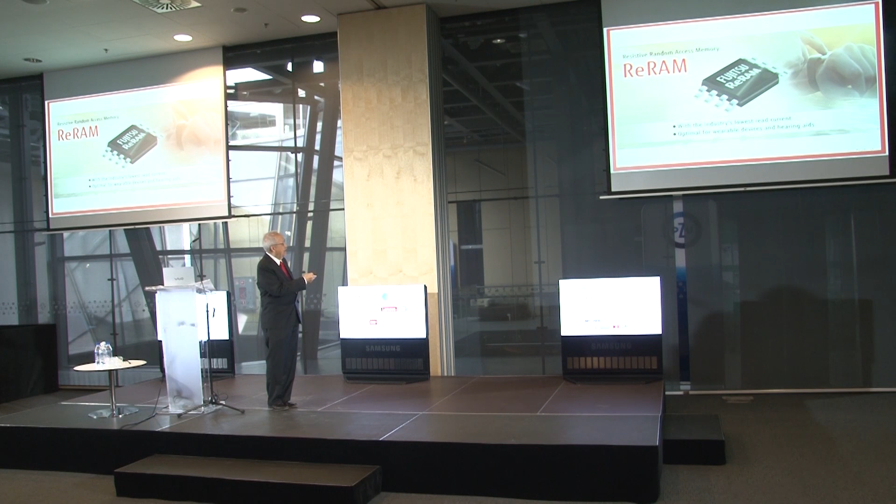This is the latest advertisement, it's a ReRAM. They advertise that you can use it for smart switches, smart glasses, hearing aids, anything on the edge, you're going to use a memristor. This is part of the latest development from Fujitsu. In a recent issue last year of Nature Electronics, there's a whole issue devoted to saying that the memristor moves analog computing closer to the edge. You're seeing the edge: smartwatch, smart glass, hearing aids, these are all getting to the edge already.

Now I'm going to start by telling you how the memristor gets started, how did I conceive the memristor. Well, it started with what I call a perfect storm. It turned out that in the late 50s and early 60s, circuit theory was undergoing a crisis situation, because of a perfect storm, the occurrence of two simultaneous events.

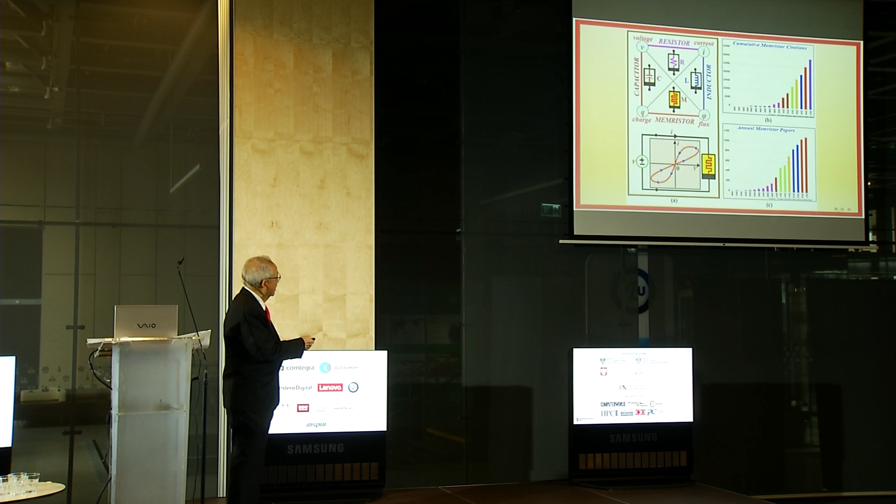And since the announcement of the memristor Nature paper, the number of citations and papers has grown exponentially. So you can see there's a great deal of interest in this fast-moving area.

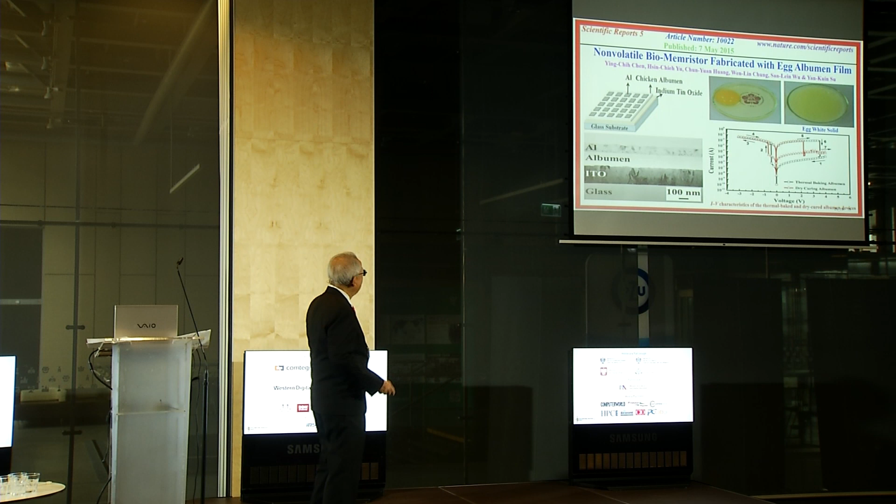Here's an example to show you that there are indeed all kinds of material you can make a memristor from. Here's a paper published in 2015, and you can see there is a pinch loop, all in the log plane, semi-log plane. You have the Lissajous loop. These are the two signatures, and they're completely equivalent.

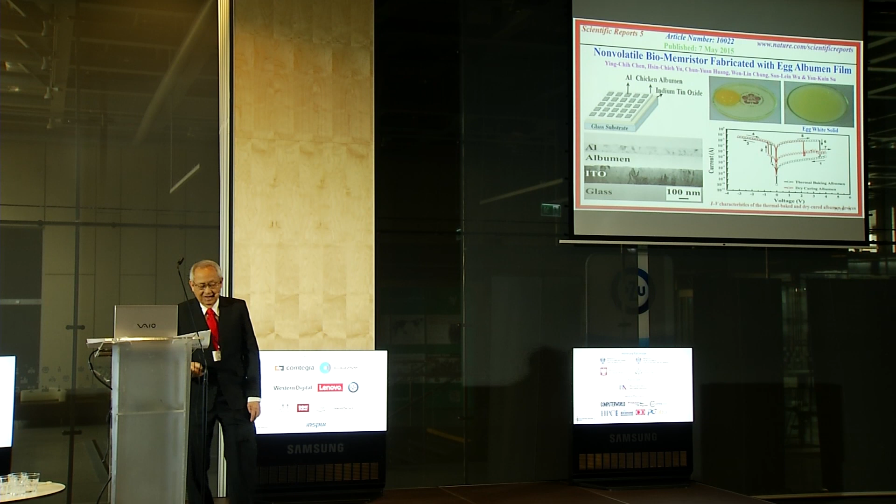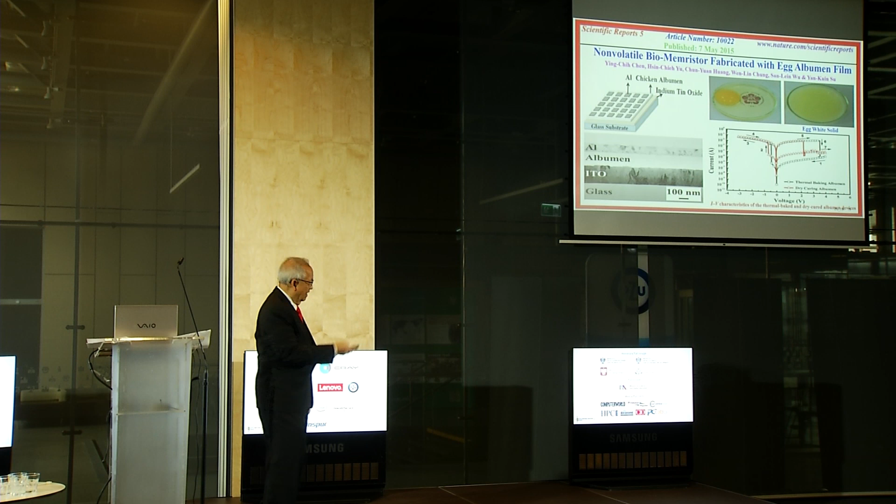It's interesting that there's even a paper in 2015 where they used egg white, and you can see this is a Lissajous curve. But among all these papers, there is one that stands out.

That was a paper, in fact, even before the HP paper, from the year 2000, by a group of authors from IBM. This paper was very influential. They didn't know what a memristor was, but they had a fingerprint which shows a memristor's pinch. I want to emphasize this by blowing up two sentences so you can see the state of the art in 2000, what IBM scientists thought this device was.

First of all, they found that you can switch the resistance from high to low by applying a negative voltage pulse of 2 milliseconds, which switches the system into the low impedance state. After that, if you reverse from negative to positive voltage pulse of 2 milliseconds, the information written in the device is erased and high impedance is recovered. So it shows that you can switch with positive and negative pulses.

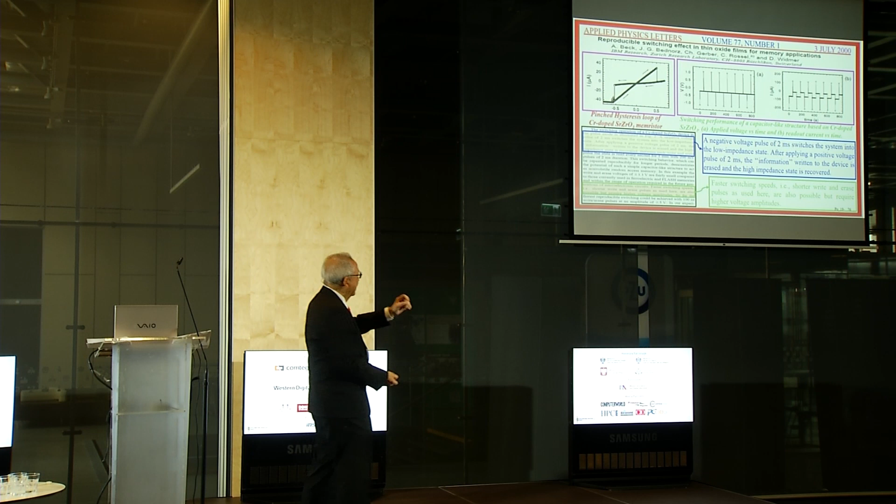But more interestingly, there's a sentence inserted here. It says that faster switching speed, that is shorter write and erase pulses, are also possible, but require higher voltage amplitude. So they observed that you can switch faster with shorter pulses by making the pulse amplitude higher. It turns out all of these phenomena are universal, as I've just proved in a paper in Applied Physics, just published last June.

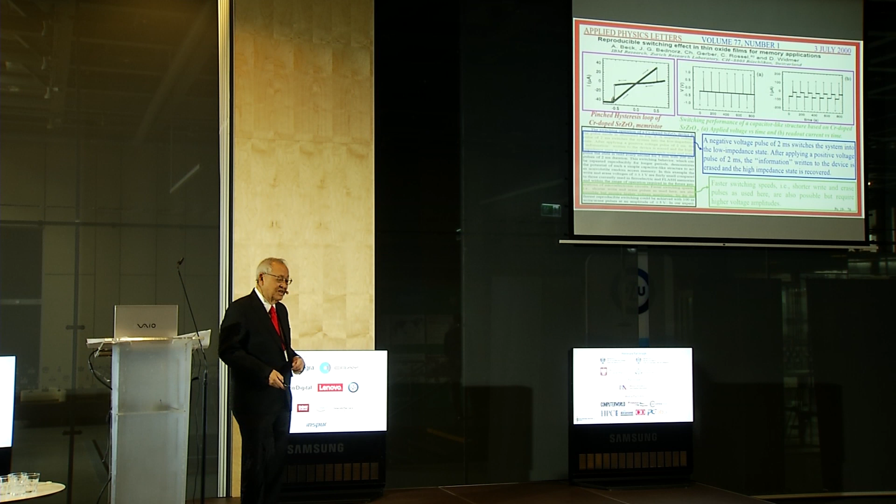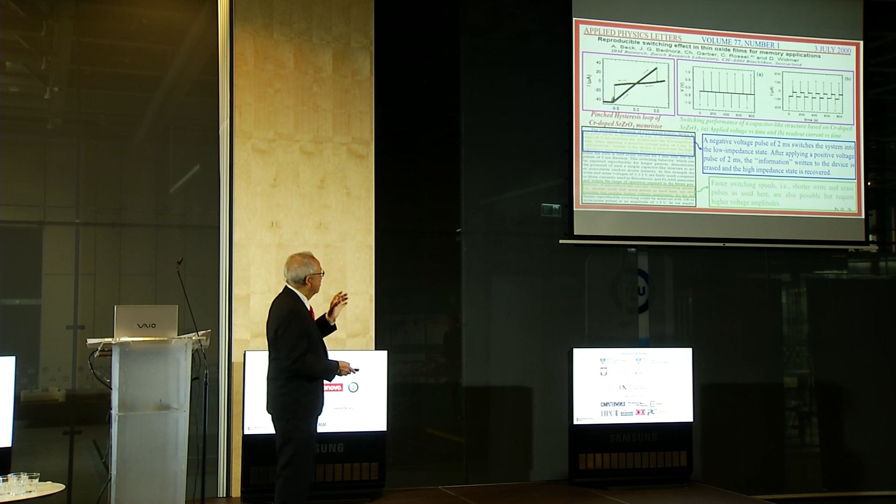If you're interested, all of this phenomena that was not known until now is completely predicted. It is true not for one memristor or two, but for all memristors.

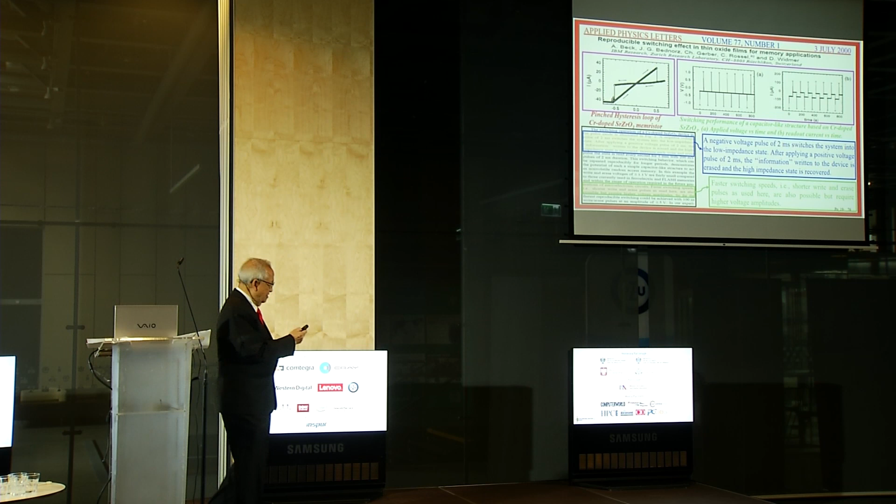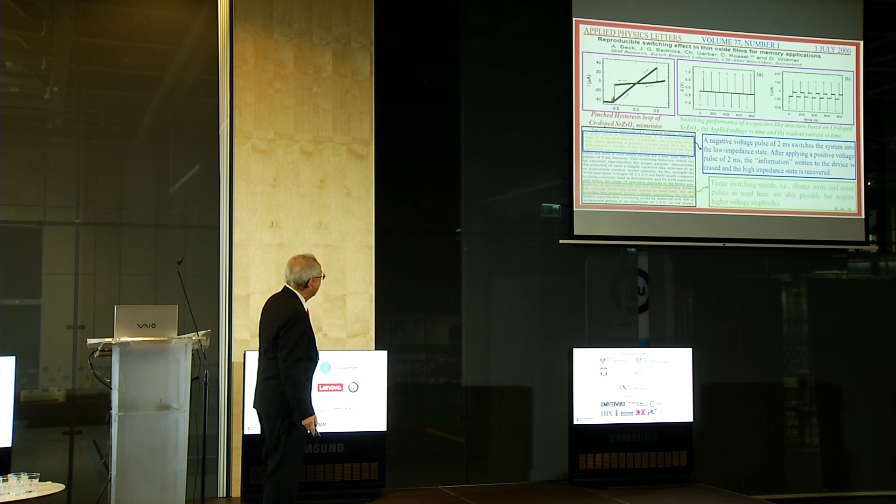Now, the reason I say this paper, among many others, stands out is because one of the co-authors, Bednorz, as many of you know, is the Nobel Prize winner for high-temperature superconductors. When people saw a Nobel Prize winner as one of the co-authors, they realized this is something to pay attention to. It is this paper, more than anything else, that led to all kinds of research.

And as recent as 2015, there was a paper that summarized what's going on. It shows the secret of using pulses, how do you know, why is it that they use pulses and you can switch? No one knew, and even as of a few years ago, nobody knew why. Now this is completely explained.

Now, there are two missed opportunities. As I said, the official announcement of the memristor is the HP paper from 2008, even though my paper was published in 1971. But already in that same year, I didn't realize until after the HP paper when I went back and looked, I found a Japanese paper, and it's interesting that the author realized the importance of a memristor, something that goes through the origin.

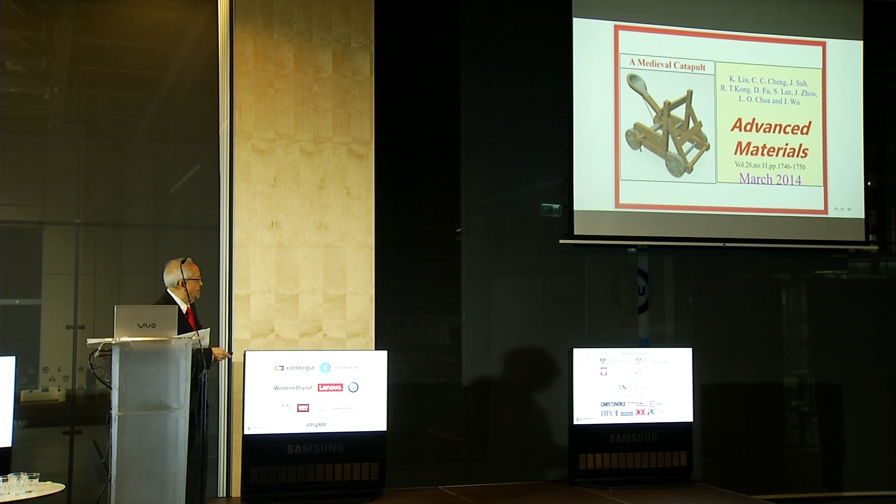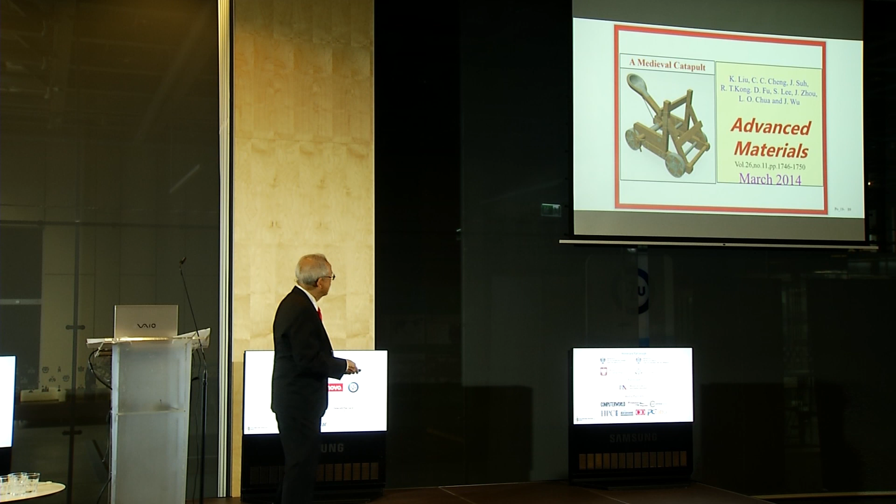So in other words, this not only makes things smaller, but of course the energy is saved. Because as you get smaller, it's the energy that becomes a severe problem because it grows exponentially. So that's one example, but I want to show you another example. This is a paper published in Advanced Materials by Professor Wu. He put my name only because he consulted me to verify that it is a memristor. For this work, Professor Wu was awarded a prize from President Obama.

And what is this device? Well, this is a device made of vanadium dioxide, and this is a coil, two identical coils with a basket here, and you can imagine what's going to happen if you put on a 4-volt DC battery. Suddenly this is going to torque. So this is why it's called a memristor motor.

The motivation for this research in Berkeley is for microsurgery or for transducers in micro dimensions, and it turned out that Professor Wu wanted to know if this is a memristor. I said, well, if it spins. So he went and made the measurement, it spins. So we know that it is a memristor.

This is a remarkable paper because it is about 1,000 times more powerful than a human muscle. So a future robot that's going to play tennis is going to beat everybody else because it's 1,000 times more powerful. Okay, it can catapult objects 50 times heavier than itself. It can catapult objects 5 times its own length, faster than the blink of an eye.

I'm going to show you a video. You can see here, this is a video, to show you that it's a motor. Okay, micro explosion. Okay. So now it turned out that Professor Wu's postdoc went in and made an analysis. So he scaled up the micron-sized memristor into the size of a turbine of a 777.

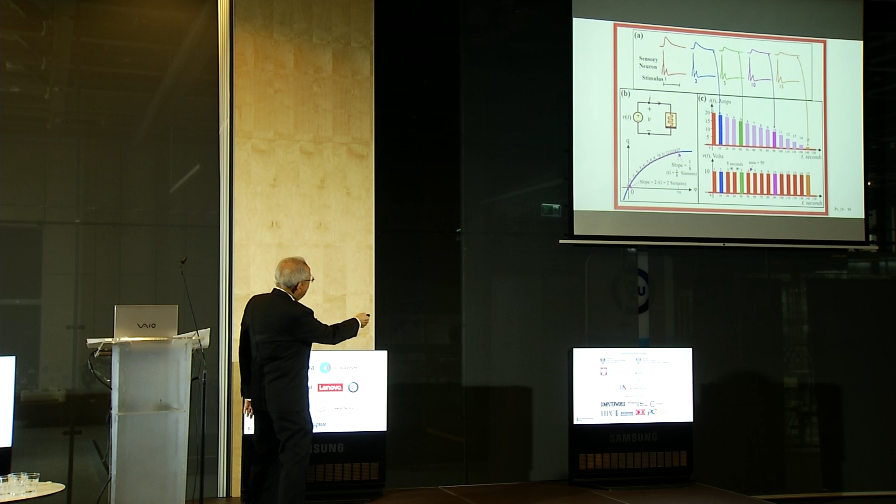So that is the first form of learning, and to show you now that you can have a memristor that will do exactly the same thing. The memristor has a simple curve like that, and these are the identical inputs, and this is the output. You see, for the same memristor, same input, all square pulses, the output can keep decreasing exactly like what Kandel has. So I've just shown you that a memristor is in fact a synapse, in other words, okay?

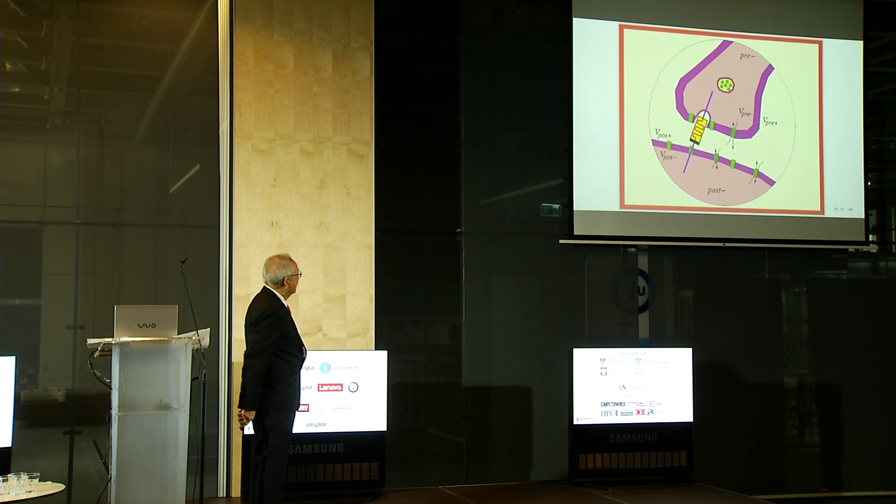And the slope is what it is. So when you learn anything, you are essentially tuning along the slope, because the slope is the concentration of neurotransmitters. Okay. Now synapses therefore are memristors. So I'm showing all those synapses; they're tiny, and there is the axon. Now notice that the memristor is a tiny proportion of the size of the body.

And the reason why we don't have a brain-like computer today is because for people who try to build neurons, the real estate it takes to make a synapse is about the same size it takes to make the body. That's obviously totally unacceptable. Now we know the memristors are tiny, even down to 1 nanometer. We now have the component to build brain-like computers. Okay. Now here's another example.

In fact, 2 years after my paper, there were two biologists in 1973. They are now famous for inventing LTP. All this learning now is based on LTP. And of course, they didn't realize it. But 2 years after my paper, they published a paper where they had an experiment. They put in a pulse here and measured the response somewhere down the line, and found that this is a volt, and the current is half a milliampere.

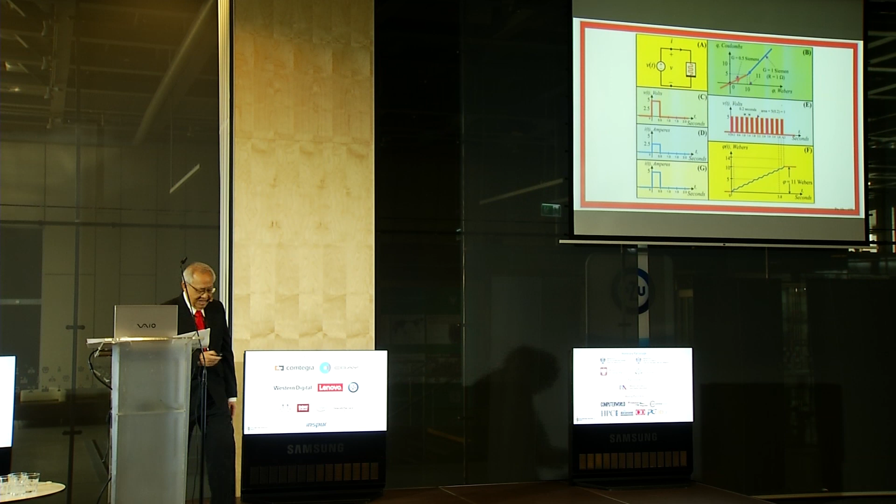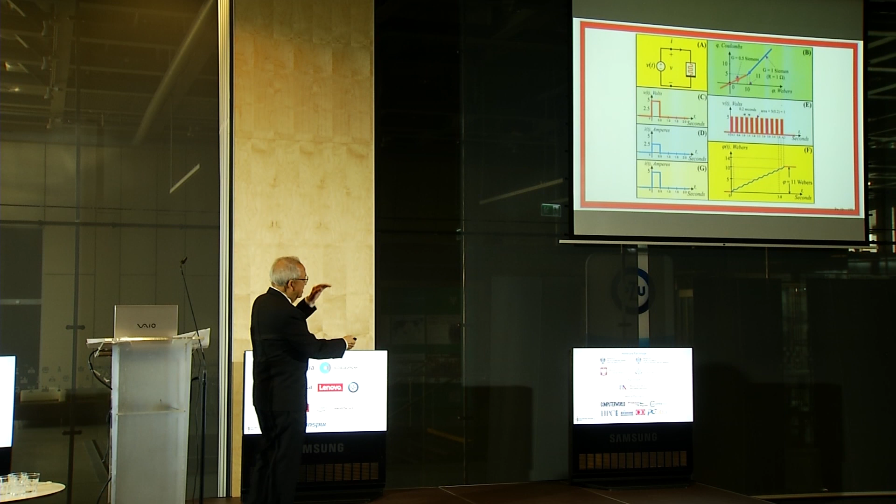And I have a memristor here. I show that with this memristor, you apply a single pulse, you get a small output. You prime it with the pulses, you will get a much bigger output. That's because the conductance keeps changing, so the current keeps increasing. So this is an example of a memristor that performs the LTP function.

Here is an example, Pavlov with his famous dog, and many of you, of course, know about this famous experiment. You have a dog, and you try to associate the behavior. You have two kinds of stimulus. Food: when you show the dog a piece of steak, it salivates because evolution sees to it that the saliva contains enzymes to digest the meat. But when Pavlov showed only the ring of the bell, another kind of stimulus, the dog is indifferent; it doesn't respond.

But Pavlov got his Nobel Prize because he had a good sense for performing the experiment. He first showed the meat, the dog started salivating, and he followed immediately with the ring of a bell. And shortly after that, maybe an hour or 2 hours later, he repeats the experiment. He rings the bell without any meat. The dog salivates. That's the first example of associative memory. And that's what you see all over Marcel Proust's book, Remembrance of Things Past.

Now, a group from China under Professor Miao and his main postdoc Yi published a paper just recently in Advanced Electronics. They put my name in because they consulted me on whether it's a memristor, and I said, if it's pinched, it's a memristor, and of course it's pinched. So this is the paper. This is very simple. This is not a simulation.

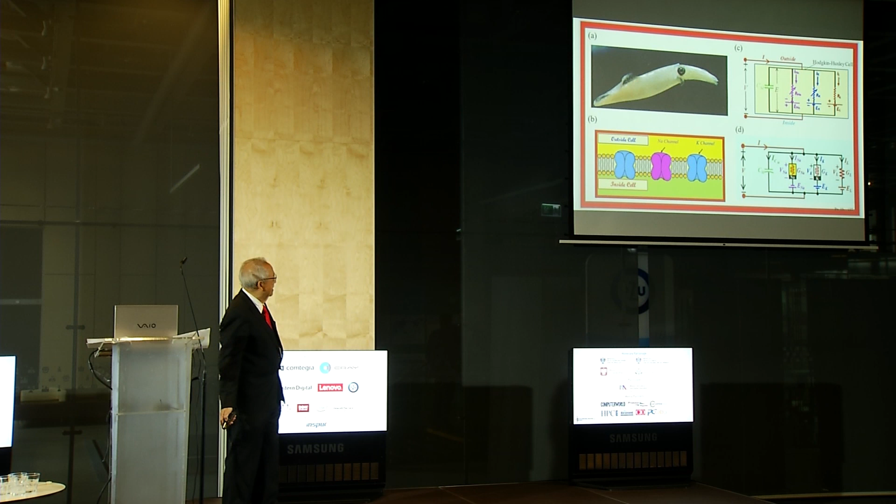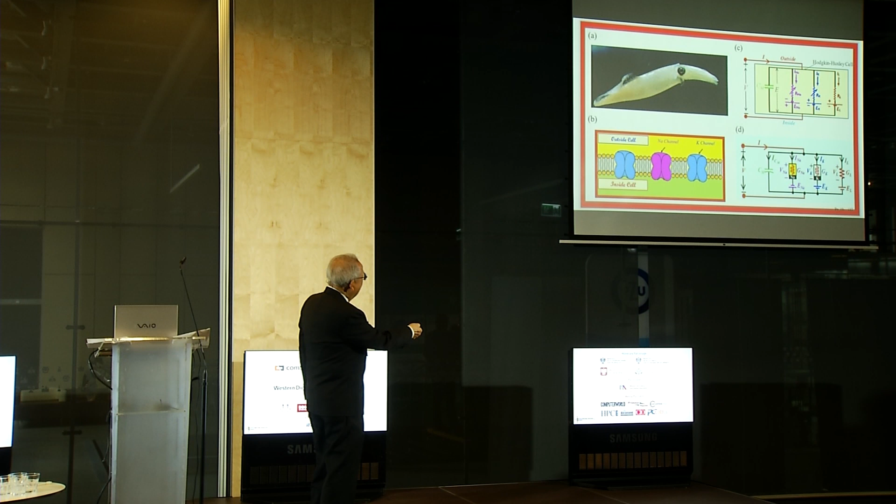Okay, so the solution of the controversy is published in my paper, and I showed that the 2 time-varying conductances in Hodgkin-Huxley are actually memristors, and with this, nothing is changed. It's just that recognizing that these are memristors, everything is resolved. Okay, so we now know that synapses are memristors, axons are memristors, and therefore brains are made of memristors. Memristors are the right stuff for making brain-like computers.

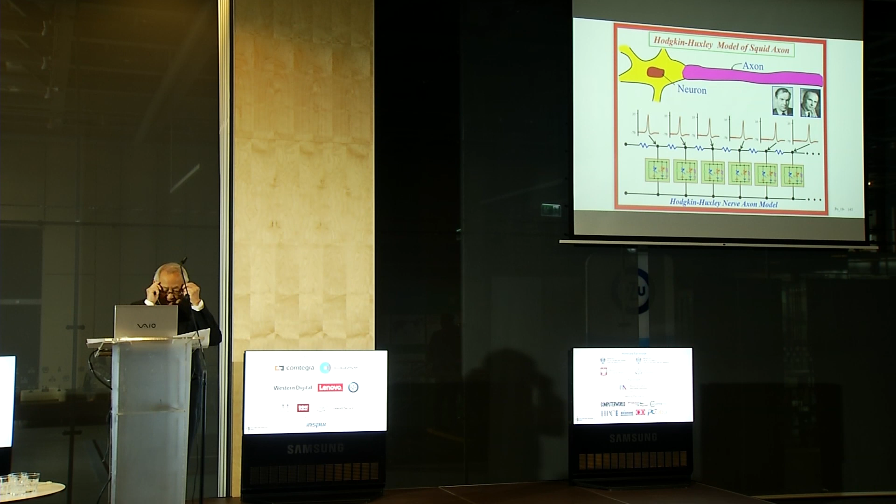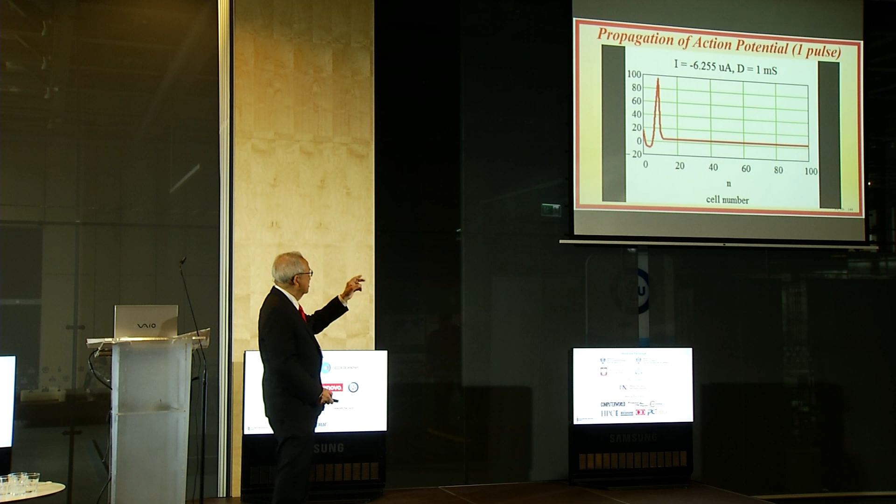Okay, and I'm going to be running out of time, so maybe I should show you one slide. Okay. If you now have a string of the Huxley model with the memristors, you are going to get action potentials that propagate down the axon. Okay. So, in the interest of time, I'm going to move on.

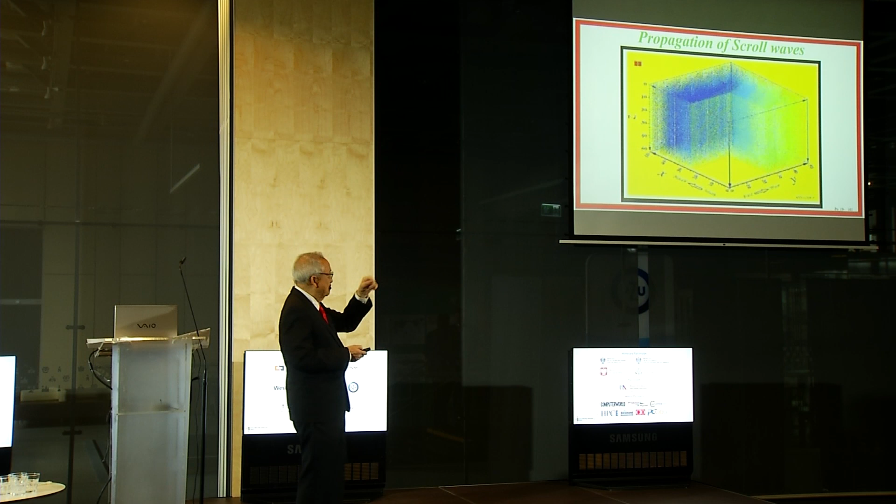If you now put this Huxley model in a three-dimensional cube, which is what I'm doing now, you are going to see the following. Imagine a small part of your brain. It's a tiny cube of your brain, but every axon is a Huxley model with its action potentials. What you get is what's called scroll waves.

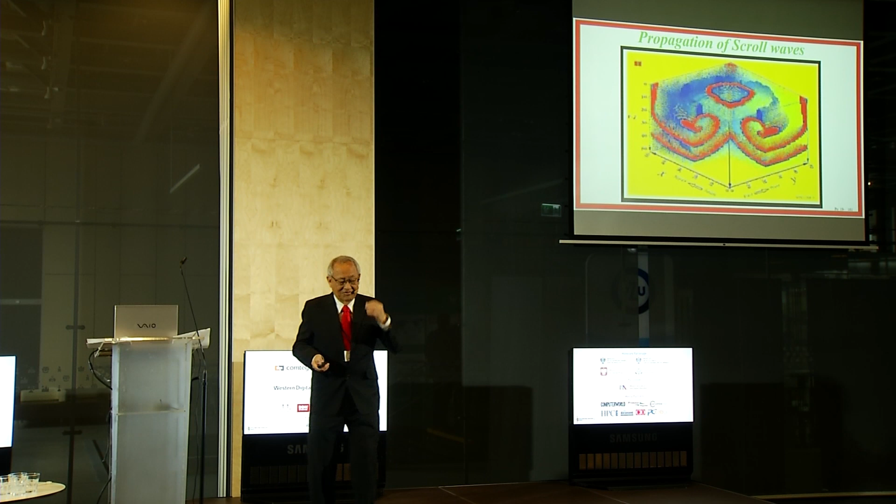No one knows today what's the physiological meaning of this, but there were all kinds of conjectures. But one thing is known, which is a negative one. For patients that have epilepsy, this would trigger epilepsy. There was a negative aspect, but there were people, psychologists, who believed that geniuses are operating in a situation like this. When you dream, when you come up with some discovery, this is the kind of signal that the brain generates.

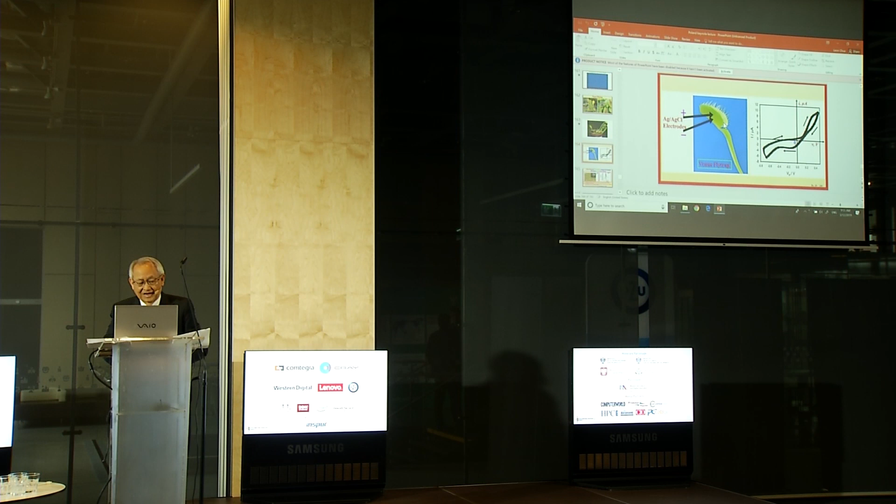You see, this is the reaction. See, touching it, it will close immediately. Now, why is this relevant? Well, it's relevant because it turns out that is a memristor. The Venus Flytrap is a memristor, and it has since been intensely studied.

It's very interesting that we have all these Nobel Prize winners with this famous work, all come in contact with memristor without realizing it. What we have here is, in fact, another memristor. Okay? All right. Now I want to move on. My last picture is a true story that I want to tell in my talk.

Imagine you are in the beginning of the 1800s, okay? And London is already a progressive society. There are street lights already, but they are from gases. So the citizens there, the bourgeois, they became demanding. Why couldn't the scientists use electricity and make this into an electric light bulb and get rid of those fumes, those smokes?

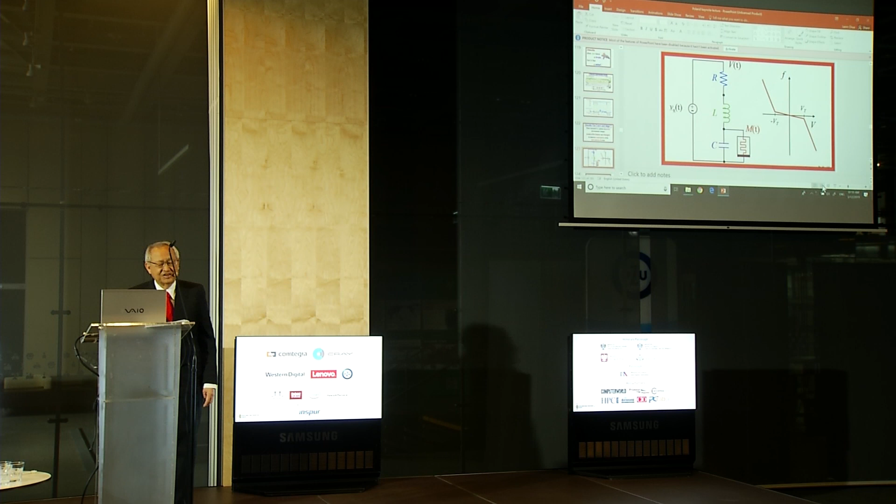So this has been emulated by a group of professors at UC San Diego with 1 memristor and an inductor and capacitor. I don't have to go into details. I want to get to the conclusion. Are amoeba intelligent? It doesn't have a brain, right? Well, let's think about the dawn of civilization. Let's go to Egypt at the dawn of civilization. This is the Nile River, okay?

And it turns out that discerning a periodicity is not easy at all, even for humans. For example, the ancient Egyptians recognized the regular periodicity of the flooding of the river Nile and succeeded in anticipating the next flood, because they realized it's periodic. This breakthrough triggered the invention of the calendar and was a symbol of the dawn of civilization.

Well, today we think of the calendar as something trivial. Well, it's not so trivial. You go back 6,000 years, the primitive people didn't know what periodicity is. The amoeba already knew, okay? So you can say they're intelligent. Well, there are other examples, but I'm out of time, so I won't show them to you.